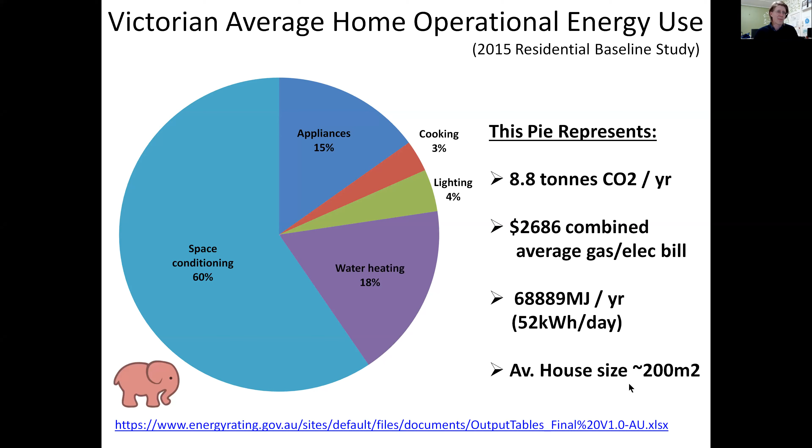All right, let's get into it. The secret to carbon zero. Now, prepare to be a little bit underwhelmed, but here we go.

So the roadmap to sustainability is nothing fancy. It is simply looking at each one of those wedges that was just on the last screen and minimizing them. So minimize space conditioning requirements, that's heating and cooling. Minimize hot water energy, minimize lighting energy, minimize cooking energy, minimize your appliance energy. And then minimize embodied energy if you want to go to true net zero. Once you've done that, you offset with PV.

And you'll see when we do this process that you can get the energy requirements down so low that it is reasonably easy and cost effective to offset it with PV. And the last step I have here is use 100% green power. And that's really just a mopping up process. Just in case you didn't quite put on the right number of panels to get to carbon zero, well, the house will be using such a small amount of energy that it won't cost very much to go 100% green power.

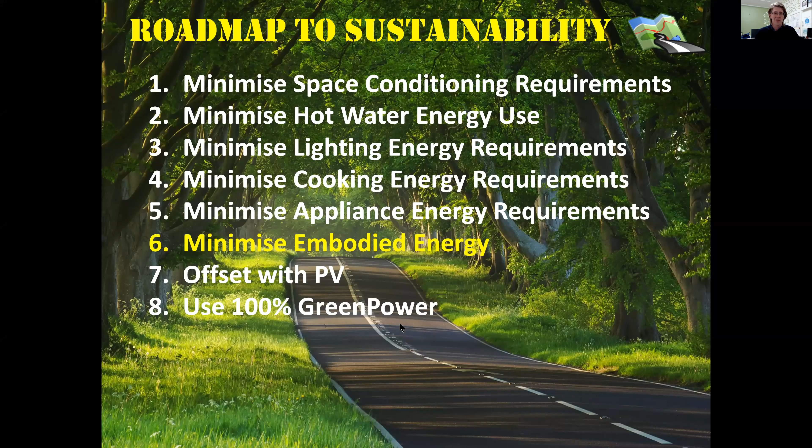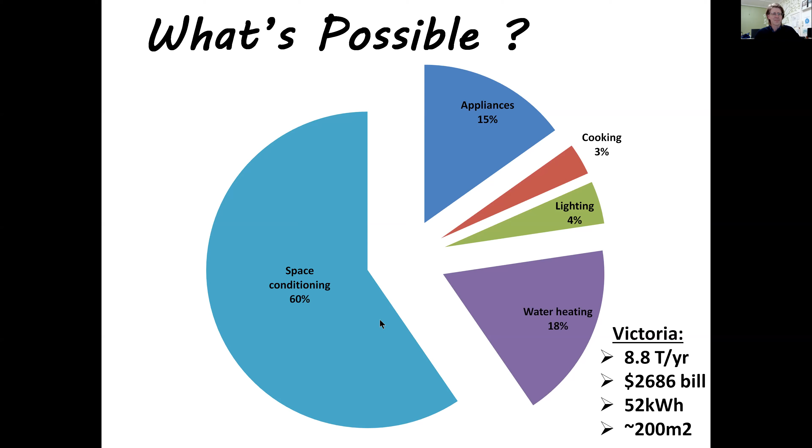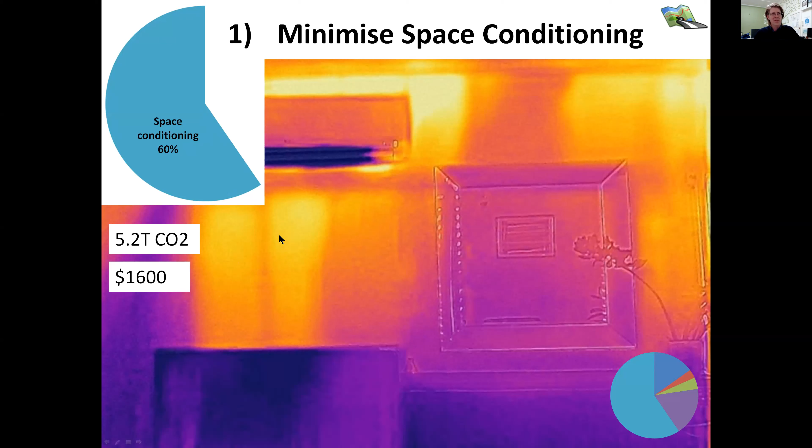All right, so what's possible? There's the same pie for Victoria. We split it up, so I'm going to look at each segment in turn to find out what's possible within each of these pies here. All right, so minimize space conditioning. That is the first step on the roadmap. And for Victoria, this is a huge wedge of pie. 60% of our energy use just goes to heating and cooling, and the vast amount of that goes to heating in Victoria. This segment is worth 5.2 tonnes, and we pay $1,600 to supply that much energy. Okay, that's what we're sort of playing for here.

All right, so the first step is just to build to meet the star rating. So if you build a 6-star home and you build it reasonably tight, you put in the insulation as specified, you make sure gaps and cracks are filled, you tape the foils around the outside in a standard construction, tape them to each other, tape them to the base plate and top plate and to the windows and the walls, seal any gaps and cracks, any penetrations that have been put through, tape back. That will be enough. If you follow the specifications on the plans and the energy rating, that should be enough to achieve the NatHERS star rating.

Now, I know that most states use the NatHERS system. I think New South Wales, you'll be on BASIX. But the point here is build in such a way that you at least achieve the star rating of the plans. And all new homes have to have star ratings, and major renovations as well. And it makes a huge difference. 6 stars, just under 50% saving of this wedge already. 7 stars, almost 2/3. 8 stars, bigger than 2/3. 9 stars, almost a tenth there. And 10 stars is hardly anything at all. You almost don't need any mechanical heating and cooling there.

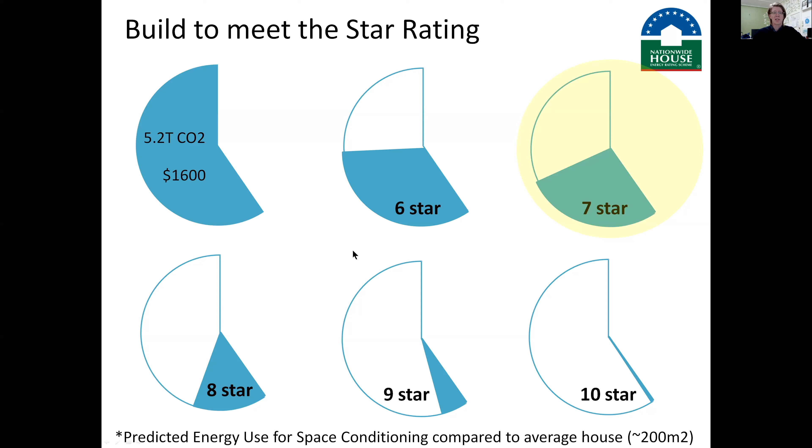Okay. So the next step of reducing this wedge, now that we've got the required heating and cooling down, is to use efficient technology. And I'm talking about heat pumps, also known as heat shifters. When I started, back in the early 2000s doing sustainable homes, an air conditioner was a big no-no for the sustainable movement. But things have turned around 180 degrees completely, and the technology has come on, and now they are super efficient at what they do.

Now, why are they efficient? And why are they more efficient than other options? I should just say, by the way, we use a lot of these wall split systems. You don't necessarily have to do that. You can get ducted reverse cycle systems. We've also put in hydronic heat pump systems as well. They only provide heat, but in Victoria, that's pretty much mostly what you need. So you don't have to go for this, but as long as it's some sort of heat pump, it should

be very efficient. And you'll notice here I've got this COP and EER greater than 3. Those are the numbers you need to look for. COP stands for coefficient of performance, and that's for heating in the unit. EER stands for energy efficiency ratio, and that's for the cooling of the unit. But what this means, I'll go back one step.

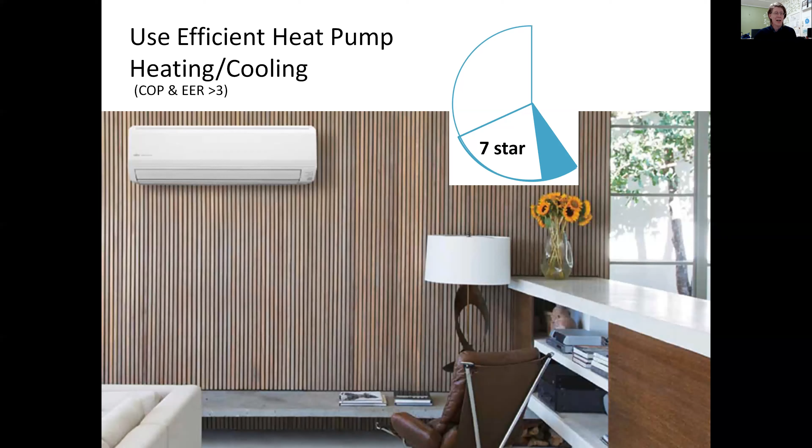Effectively what that means is if you put on some sort of heat pump heating and cooling, you can provide this wedge of heating that's required with, in this case, 1/3 of the power. So there we go. Straight away, we've knocked off just over half of the whole energy load of a house in these 2 steps, just building to the star rating of 7 stars and putting on efficient heating.

Okay, let's have a look at the paybacks here. So we've saved 4.4 tonnes of carbon dioxide. And off that bill of 2,686, we've saved $1,300 approximately per year. So big savings. And what did it cost? For the designer, like I said, 7 stars is a low level for a design to meet. There should be no cost.

For a builder, there may be, it depends on the builder, but for us, we have a standard. We'd just put R2.5 in the wall and at least R4 in the ceiling. But if you're a builder working to minimums, say an R1.5 in the wall for a 6-star house, you now have to upgrade to an R2.5. And if you're not used to taping up the foil properly, as per specification, there will be a little bit of cost for you, at least initially until you understand the process.

Windows, again, I've got 0 to 8,000. I've got most of my clients coming to me already wanting double glazing. They want it for soundproofing, and because double glazed windows tend to be a lot more sturdy and a lot more secure; it's very hard to break in through a double glazed window.

Now, if you've got a 6-star home and the only way to get to 7 stars is to double glaze it, well, that would be the worst case scenario. Let's change all the single glazing to double glazing. There's $8,000. But you'll find that most designers really should be able to slightly rejig the house so that you can get to 7 stars with single glazing potentially. If you've got good solar access, maybe low E glazing could get you there too. And that would be a cheaper way. But like I said, a lot of our clients want to go double glazing and it's becoming the industry standard.

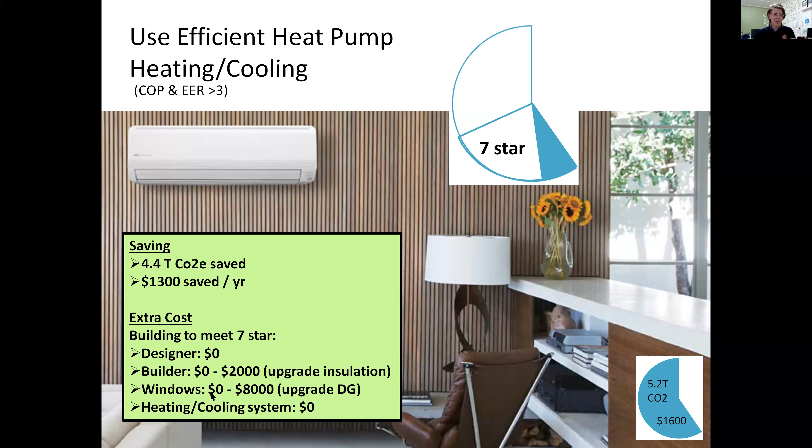All right, let's move on. We've done that pie. We've done very well on that pie, and very realistically too, I'd say. The next wedge here is to minimize hot water energy. Next step on the roadmap. Okay, it's worth 18%, which is 1.6 tons of carbon dioxide as a result of the energy that provides this hot water, and $480 of your hard-earned cash goes to making the hot water.

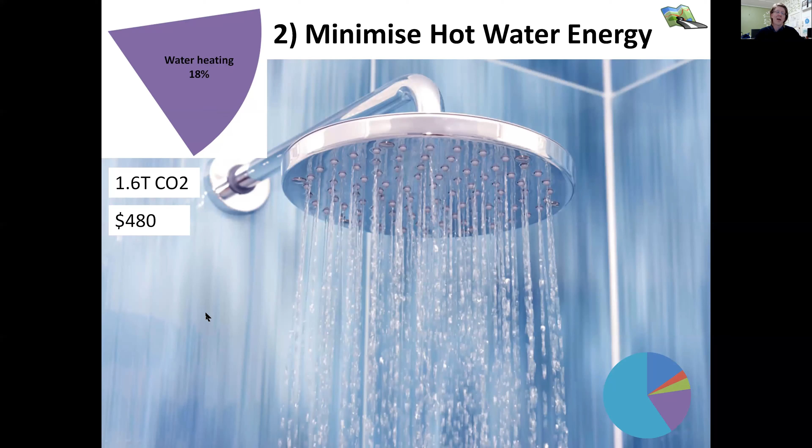So how do we minimize this step? Very simply, the first thing is to try and minimize the amount of hot water that we need. And where to focus our effort? So half of the hot water in the house will typically go to the shower. So it makes sense to focus and communicate with the client and tell them that and see if you can get them to go for a low flow shower head.

Now, as a builder, what I would suggest you do is you look for efficient appliances, so that you can have a communication with your client and say, look, I'm trying to get you to this 0 carbon outcome. And I know that appliances and things you put in the house are really important. And I've tried these appliances and these fixtures before, and I think they're value for money. They give me a good shower, yada, yada. Builders have a lot of power during that construction phase of influencing things. So, talk to your client and hopefully you can get them over the line if it's not already specified.

Of course, if you're a designer, make sure you specify the shower head. And again, talk to your client and tell them that we're trying to get you to a very low impact home and a very cheap home to run. Washing machines typically will use 1/3 of the hot water. So once again, instead of a top loader, a front loader. And you can choose by these water star ratings as well. The rest of the fixtures don't really matter. Low flow, fantastic. There's not a huge amount to be saved there, but it doesn't hurt to have reasonably low flow. Okay, you do that and straight away you've saved about 1/3 of your hot water needs, right? You just don't need that hot water anymore.

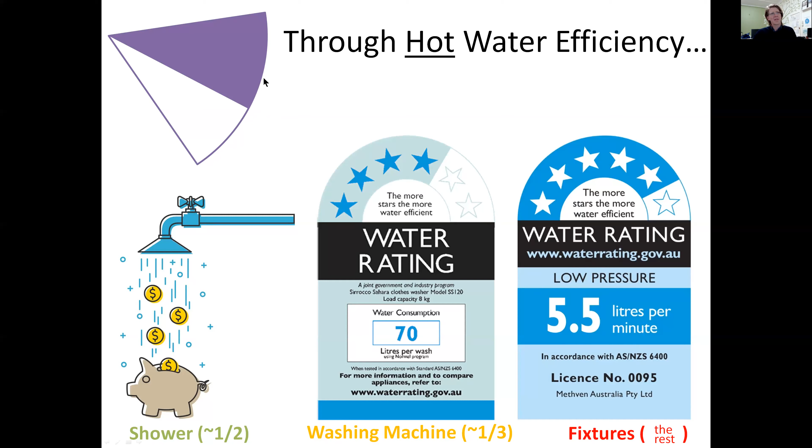Okay, how do we get rid of the next bit or more of this wedge? Well, once again, you look at the water heater that's providing the hot water. So here I've got 2 different options. Once again, we've got a heat pump, that same heat pump technology, but instead of heating air, this time it's heating water. Now, this just happens to be a brand that we use, but there are other brands on the market. They all do a similar thing. Again, you're wanting to look at what their coefficient of performance is. A 4 is better than a 3. A 3 is better than a 2.

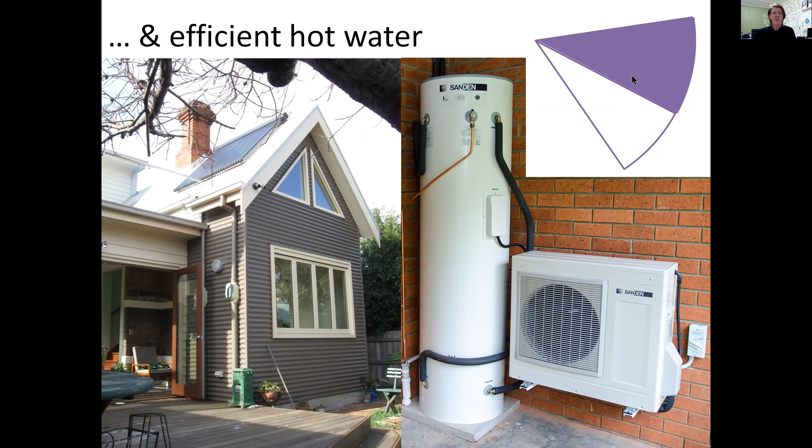This one just happens to be somewhere around 4. All right. The other way to go is solar hot water. And with a solar hot water system, you'll be getting 3/4 of your hot water from the sun, with a good system. So that would be another optional way of providing this amount of hot water, but with a lot less energy.

Okay. If you do either of those methods, you can quite easily save another 2/3 of that leftover bit of wedge. And straight away, you can see we've saved a huge amount of this wedge up in the right-hand corner. What have we saved? 1.3 tons of carbon dioxide, $400 approximately in energy. Again, money in your pocket. And what are the costs of these systems? All right. You do have to pay extra for them over your standard hottie.

So to go from, say, an instantaneous gas booster to a heat pump, you're looking at about $2,900 extra. To go for a solar hot water, you're looking somewhere between $4,000 and $5,000 if it's a large system with a booster of some sort on it. Typically more our clients are going towards the all electric home, and so we're putting in the heat pump. In the past, we've put in a lot of solar hot waters too. They're both really good products.

But if you look at the payback, $400 a year saved, $2,900, you'll pay that back in 7 to 8 years. The solar hot water, maybe you're looking at 10 years, and it'd be quicker than that if you've got a big family. So just bear that in mind. But once again, once they're paid back, fantastic. It's all just money in your pocket instead. And of course, from day one, you're saving the carbon impact.

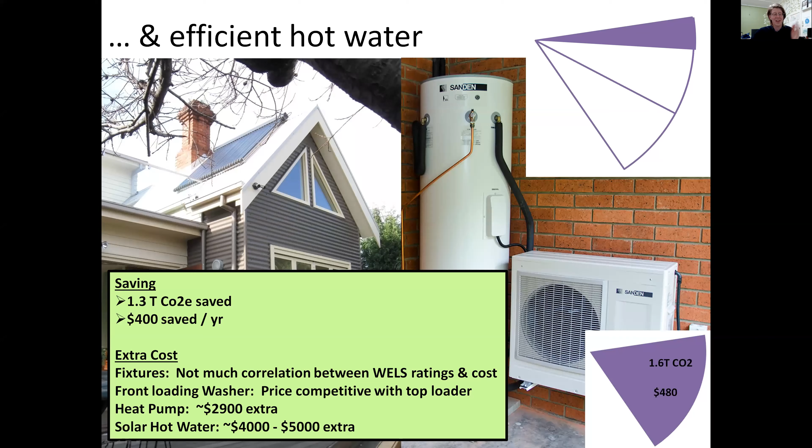Okay, so you see how we're working our way around this pie in just a logical, straightforward fashion. There's no gimmickry, there's no special passive solar knowledge that is needed, right? Next one is lighting. Now, lighting is only a small wedge, but it's a really easy one to get. Basically, first, you can get it by going to LEDs. I'll cut a long story short there.

But while I'm on the screen, I just want to show you, downlights are something to try and be avoided. But this is more from trying to keep the home nice and tight and well insulated. Because every time you cut a hole in the plaster, in most conventionally built homes, the plaster is part of the tightness membrane, even if people don't realize it. And every time you cut a hole, you're introducing a breeze path that, if the wind's blowing over the top of the house, it'll just be sucking air out.

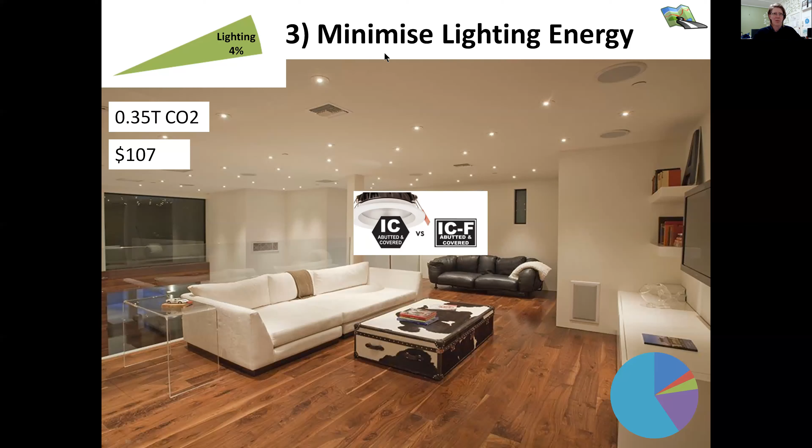Now, the other thing is often with downlights, you have to remove the insulation around them. If you must have downlights, make sure that you choose a downlight with an IC rating, IC or ICF rating. And that just means that you can actually butt the insulation right up to them. At least your insulation isn't compromised, but you still have air loss through them unless you caulk them all, which is a bit of an ordeal.

Instead, go for lights that hang into the room. You need much less because they are allowed to spread in 360 degrees. And if you do that, it's quite easy to get approximately 40% saving on that little bit of wedge. So we've saved 0.14 tons of carbon dioxide, $40 saved. And really, I've written here that it's either a saving or cost neutral. It really depends on the lights that you buy.

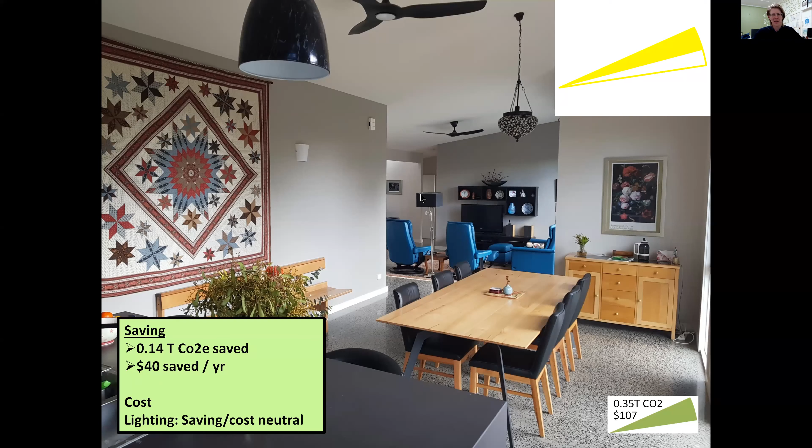But I know which would be cheaper if I was doing as many downlights as in the last picture versus a few pendant lights. Definitely the pendant lights. You save on the electrician's labor there. All right, let's go to the next wedge and see what we can do.

Minimize cooking energy. Now, this is often one that some owners can find a little bit hard to get across the bar because a lot of people like the idea of cooking with gas. And I can understand this, and it's only a small wedge. So if your client really is adamant that they want to go with gas, if you're a builder or designer, or if you're a homeowner and you want to go with gas, it's not a huge bit of the wedge.

And later on, when we put on solar panels, it will just be a matter of putting on a bit more to make up for the carbon that you're burning, or the methane and things that are coming off when you're burning the gas there.

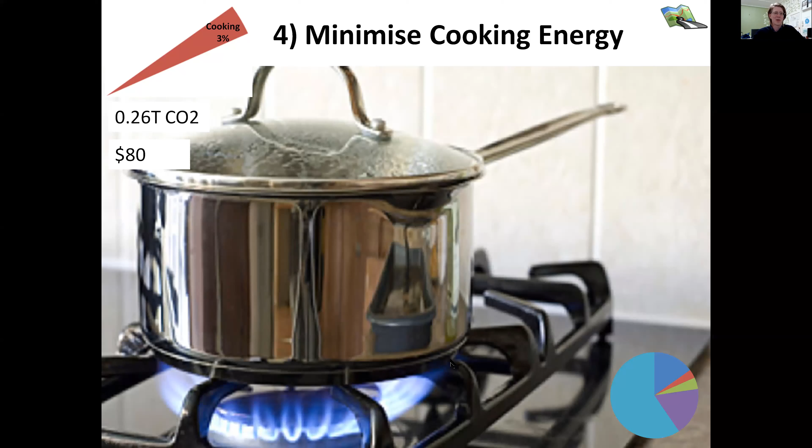However, the real value, well, I'll go back one step. What can you do, first of all? So I'm suggesting induction cooking. And the reason I'm suggesting this is partly because induction cooking is 50% more energy efficient than gas. You lose a lot of gas around the sides of the pots and the pans that you use. In induction cooking, you don't get that, and it's just a more efficient way of transferring heat.

But the real benefit of this is in the fact that, assuming that you have used an electric heat pump for heating of the air, heating and cooling, and electric for the hot water, this is really the last gas appliance in the household. And if you get rid of this gas appliance, you can get rid of gas completely, which means that you save on the meter charge, on the connection charge, which is approximately $1 a day. So you're going to save about $300 every year, for the life of the house if you want,

in not having gas. It's also, for a new home, a lot cheaper to run an electrical circuit to power this than it is to run a gas pipe for the plumber. So something to bear in mind there. All right, and if you do induction cooking, you get almost 50% saving. Of course, you don't get 50% because there's still a microwave. You still got your oven. So there are other things that use energy in the kitchen.

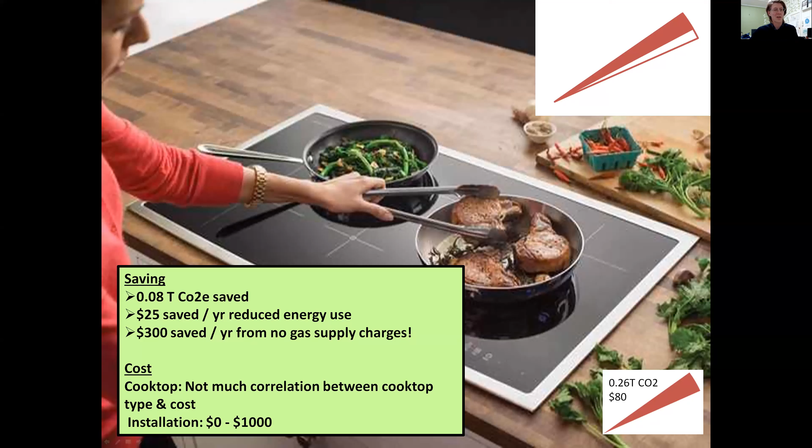And it might be the case, depending on the size of the house and the amount of electrical appliances, you might have to upgrade your meter once you go all electric to a 3-phase meter. And in that case, there will be the cost of the upgrade of the meter. So that's why I put the $1,000 in there. It really depends on circumstances, what you need to pay there. The good thing is though, if you do upgrade to a 3-phase meter, you can put on more solar than you can with a single phase. So bear that in mind.

All right, the last bit of pie. So we've worked our way around to appliances. Now, I understand completely, as a builder, you might get plans and it doesn't say what the appliances are, or it says provided by owner. And it can be very disappointing if the owner comes back with a 2-star bargain that they found at the local shop. Because that's going to reflect badly on their energy bills and they're going to be paying for it later. And really, like I was saying, a lot of this is getting everybody on the same page.

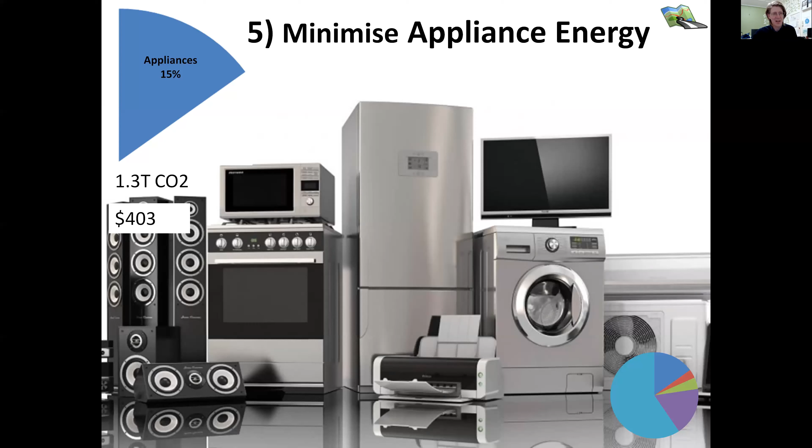The homeowner, the designer, the builder, the council, everyone giving the same sort of information and knowing we're trying for an outcome that meets all the functions, obviously, but is also low energy. We're going for carbon neutrality. And so what I would do as a builder or as a designer, running a design and construction company, I would recommend that before my owners go shopping, and a lot of owners want to pick their own stuff. So again, have your own suggestions, suggest them to the client, but if the clients want to pick their own stuff, send them to this fantastic website, energyrating.gov.au. This is a program that the government has set up which controls the stars and the energy performance of different appliances.

And the secret part of this website is this part, the search registration database. There's the address if you want to go to it. But on that search registration, you can choose your appliance. In this case, I've chosen refrigerator, freezer. And you can search by size, and then you can search by type, double door, single door, freezer at top, freezer at bottom, and then you can rank by energy efficiency.

And I'd always suggest owners just have a look at these tables before they go shopping so that you know what is best performance in class, and you can check it out. Is it a good price? Is it not a good price? And with these appliances and with choosing stars, we don't need the clients to get the most efficient thing. You'll find that as long as you're not the worst and you're somewhere near the top, that's good enough. So there's a lot of latitude there to shop around and choose something that's on sale.

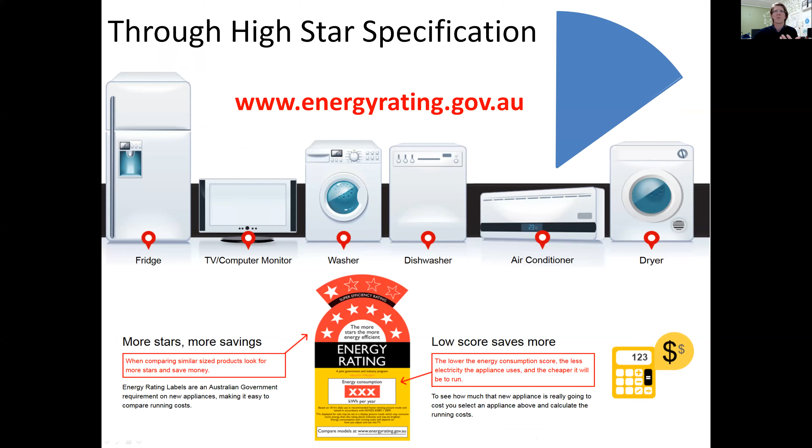All right, so what can we achieve if our clients actually went off and they were choosing things and part of what they're choosing on was the star rating? What could we assume? We can assume about 30% saving. Now, it's not greater than that because white goods is not the only thing in the house. We've also got consoles, chargers, phone chargers, bits and bobs that go in the house over time. But it's still 30% saving, 30, 40% you can just by making good choices.

And here we go. What have we saved? 0.46 tons, or almost half a ton of carbon dioxide. That's a lot in the gas, right? $140 saved per year off the bill. And costs, once again, doing a Google search, I couldn't find much correlation between the energy rating and the costs, even within the same brand line. So yeah, hunt around. Choice magazine would be another one that I would recommend clients go and have a look at before they go purchase things. It's nothing worse than buying a dud appliance, and that's definitely not environmental if you have to throw it out and buy another one.

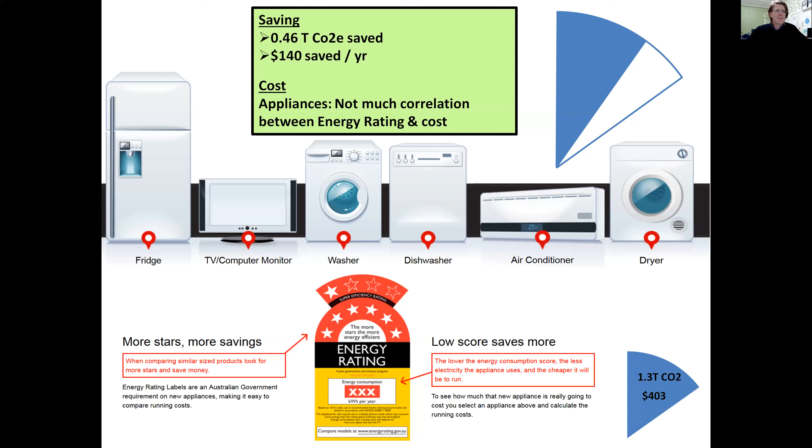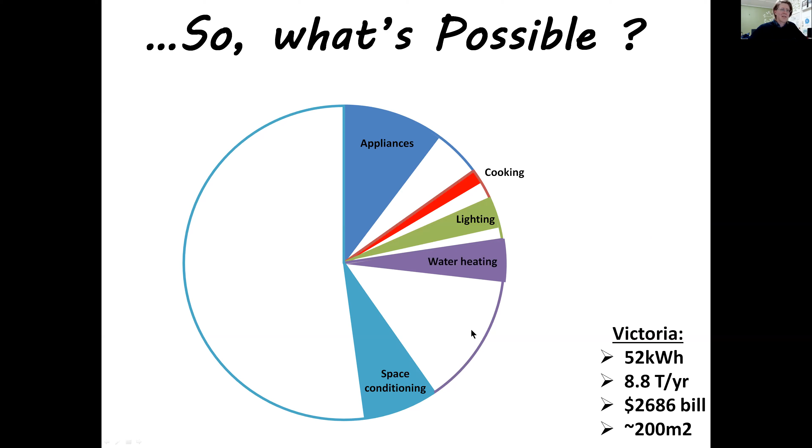All right. So what's possible? Here is the same pie, but you can see all the savings that we've made. So the whole thing, of course, was 52 kilowatt hours. The whole thing was 8.8 tonnes per year. The whole bill, 2,686. Now, if you push that all together, it makes it easier to see what you've saved. You've saved over 2/3, going for 3/4 just on energy efficiency. Now, that is huge. If you're wanting to go to a low carbon economy, look at what we can do in domestic homes just in efficiency, and that is not losing function. You've still got all the same functions.

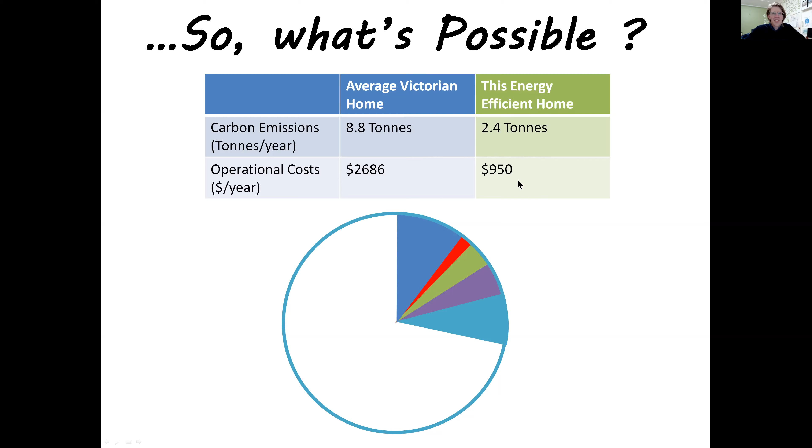All right, let's look at this table quickly. 8.8 tonnes and 2,686. That was your average standard home. Now this home, 2.4 tonnes, $950. So at least a 2/3 saving on both of those. The last piece of the puzzle is to put on enough panels on the roof to offset that. This is actually a picture of the first house. They sent me their bills and said, look, we're producing way more power than we're using. I was super proud of that.

What's a little bit difficult for me though was that on this house we still had gas, so it's difficult. I wasn't able to get the gas bill and compare overall, were they producing more power than the combined megajoules of gas and their electricity bill. I suspect they were, because they were so far in front. But that's one of the problems of having dual fuel. It's very hard for a client to monitor that effectively.

Okay, so how much do we need? So in my experience, once you have done this, for an average family, a family just living day by day, 4 persons, you'd expect to probably start from about 5 kilowatts to break even. 4 to 5 kilowatts, you should start to break even. But me, I'd be putting on more now.

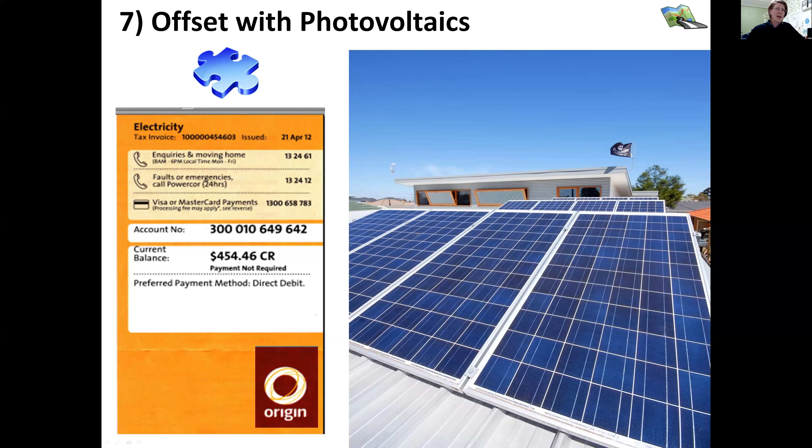Okay, that's the theory. So I want to show you a couple of homes just very quickly. Now, these are 2 homes that are open. Well, when I say open, they're virtually open at Sustainable House Day this year. And I would recommend anyone who is interested to go to sustainablehouseday.com and to check out the homes that are there and see what people are doing these days. Now that the technology is there and the price point has come down, it's super feasible to get to carbon zero.